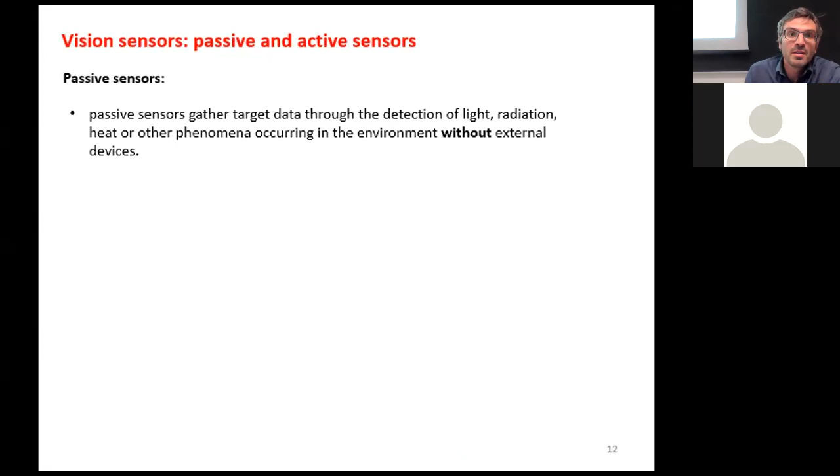So in essence, in vision, in robotics, we have some exteroceptive sensors that are used to detect information from the environment. They are mainly classified into passive sensors that detect radiation and light, like the most famous one, the camera and image sensors, and active sensors that use an external emission device and a receiver to get information on the environment around the robot. The main type of active sensor used in robotics are called time of flight sensors or structured light sensors.

In case of camera sensors, we can use them for measuring distance, or to detect a 2D image. We will see later on how to reconstruct a 3D map from the environment using two cameras.

They are made with photosensitive elements called pixels that transform light into electric energy. This light is directly converted into voltage or current proportional to the light intensity, and mostly these sensors are grouped into big arrays of millions of pixels, and that's why we talk about megapixels when we talk about cameras. A camera also contains other elements like a shutter, lens, and preprocessing electronics.

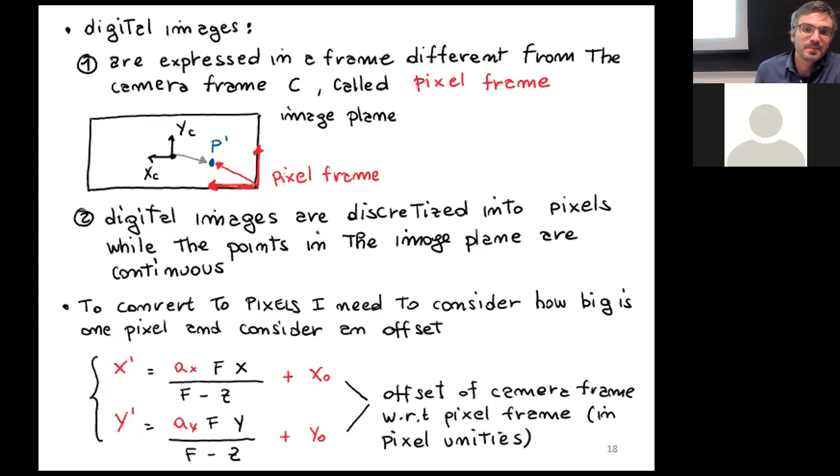Now, the size of the camera could be rectangular, so we can have more pixels on the length rather than on the height. So we can capture this effect by setting two different parameters for vertical and horizontal components. You have to note that all the points on the P prime line map to the same pixel, and that's why we have a projection.

The important fact is that this projection is a nonlinear transformation because we have to divide by the Z component. So we have a nonlinearity here.

But what we want to do, to be able to perform calibration of the camera, is to have a linear transformation to map between P and P prime. Having a linear transformation allows us to represent this relationship as a matrix vector product, which will allow us to perform calibration. To convert the relationship into a linear one, we need to change coordinates.

So we use another system of coordinates called homogeneous coordinates, which is normally used in projective geometry. The peculiarity of homogeneous coordinates is that if you multiply the homogeneous coordinate of a point by a scalar, the resulting coordinates represent the same point.

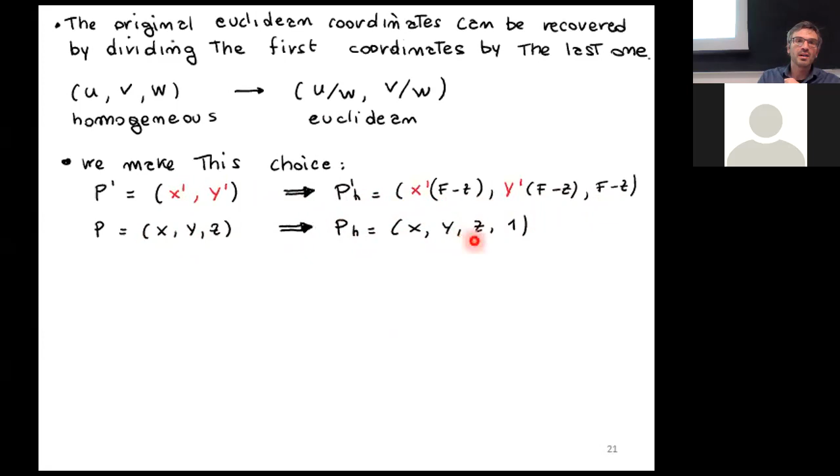Since we can associate whatever homogeneous coordinate we want, for the p prime point we select this set of homogeneous coordinate, while for the p point we select another set using the scalar 1. If we look at the previous relationship expressed in homogeneous coordinate, it simplifies to this one. And we see here that this relationship is linear, because you can put it in a matrix form and obtain a linear relationship between the p point and the p prime point, both expressed in homogeneous coordinate.

And this matrix here is called the camera matrix. If we define the camera frame at the lens center and not on the image plane, the K matrix simplifies a lot and becomes like this. So this is what you find in many textbooks, but for the derivation I prefer to use the other definition.

Up to now, everything is clear, also from the people online. It was a bit fast, the recap, but hope everything is clear. So, we have one problem here.

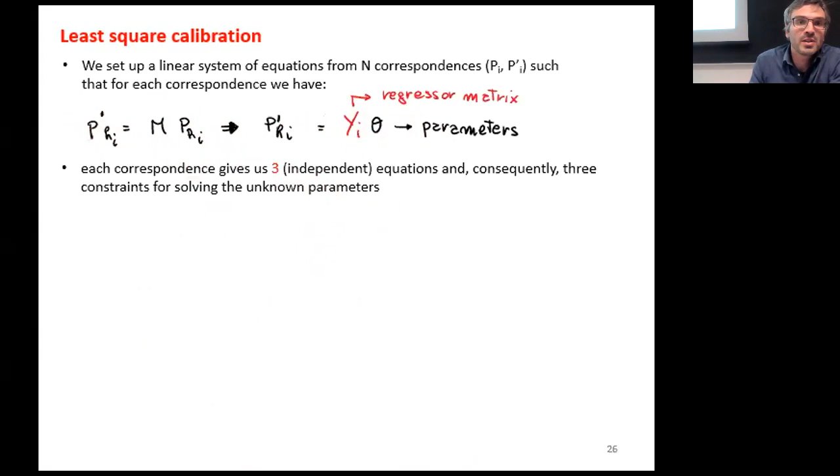You can work out the parameters and fill in this matrix, called the regressor matrix, and each correspondence gives us three independent equations that you can use to solve for the unknown parameters.

So if we have, for example, 11 unknown parameters, because we have 5 intrinsic parameters plus 3 extrinsic rotations and 3 extrinsic translations, it means we need at least 4 points, because 3 times 4 makes 12, bigger than 11, to solve this.

In reality, because measurements are noisy, we can get a least square solution that tries to minimize the residual by taking more measurements. So we usually have more than 4 points.

And if we put this in a big matrix form, we can compute the parameters through the pseudo inversion of this regressor matrix Y.

Everything is clear, more or less. Did you understand how calibration works?

It means taking many points of correspondence between the base frame and the pixel frame, and then getting the parameters by performing a pseudo inversion.

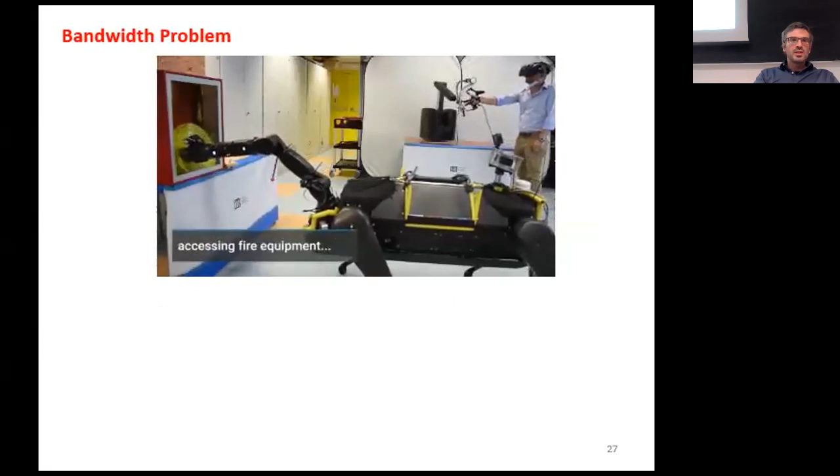Let's do a simple example of how much bandwidth we waste. We see here this is a real robot, still operated by a user who sees whatever the robot sees through a camera feedback. It's picking up objects, moving them, using the feedback from the robot. It's creating a virtual reality environment that the user uses to teleoperate the arm to pick up the object.

But let's see how much bandwidth we need to transfer an image. For example, if you have a very small image, like 576 pixels height and 768 width, we can compute how many pixels we have per frame with a simple multiplication.

We can encode this pixel with 8-bit. For example, in grayscale, we only need 8-bit for each pixel to encode the grayscale intensity. And we need to multiply by the frequency we want to transmit this frame, which should be at least 25 hertz for humans.

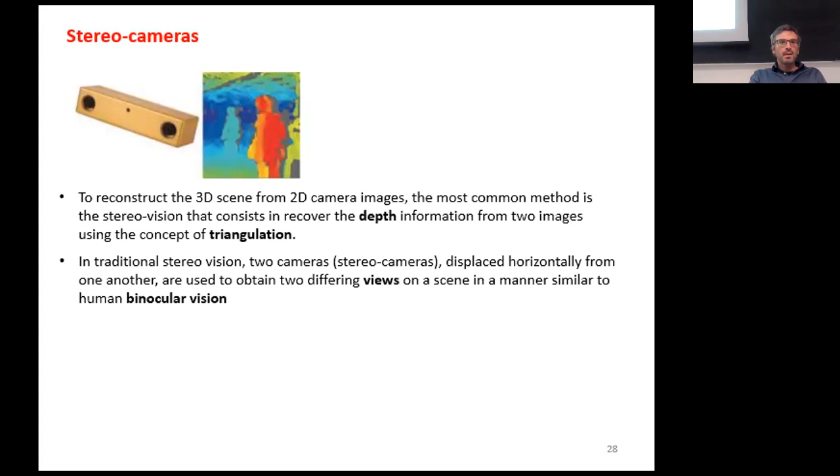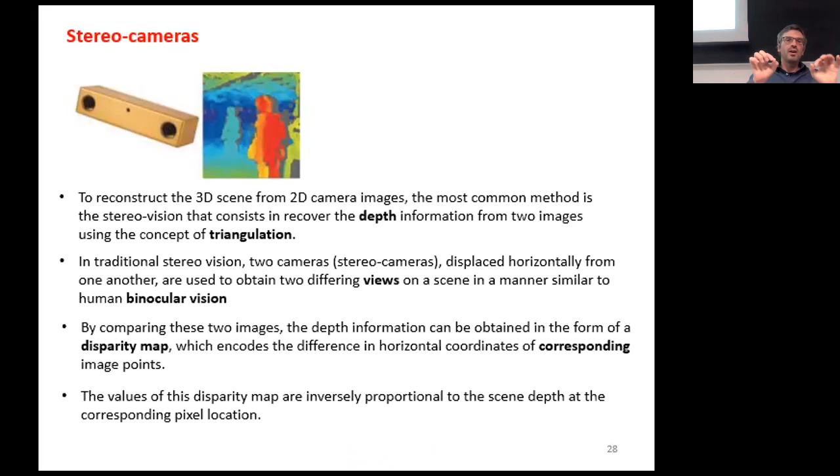This separation allows us to get two different images, and from the difference between these two images, which we call the disparity map, we can reconstruct the depth information. The values of the disparity map are inversely proportional to the depth of a corresponding pixel location. So for every pixel in our two images, we have a difference between these two points, and according to the difference, we can get the distance.

So think about, for example, we have two cameras, one on the left and one on the right. They are separated and have two different image planes, one for each camera. These cameras are located at a distance called B, which we call the baseline.

The same point P is captured in both image planes, creating two points that have a different distance from the camera center, called XL and XR - XL for the left camera and XR for the right camera. The difference between XL and XR is called the disparity for point P.

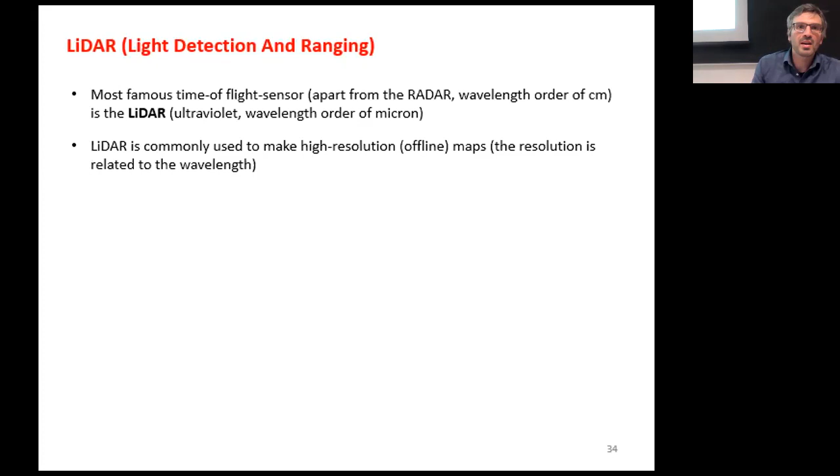LiDAR is commonly used to make high resolution maps, normally offline, using laser waves that can be reflected by very small objects, giving very high resolution. These LiDAR sensors are used, for example, in self-driving cars to create a map of the environment, or offline to create a very accurate map of a warehouse or an oil platform.

A very interesting application we were asked to develop by the region of Valle d'Aosta was to explore the tunnels, the water tunnels used to fill up dams and lakes, or used in hydraulic power plants. Inside the mountain there are kilometric long tunnels that need to be checked every year for water leaks or landslides that could block them.

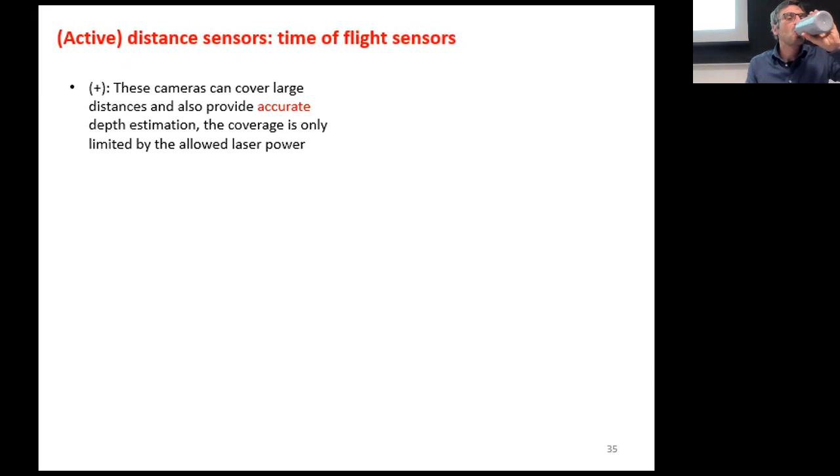Then another time-of-flight sensor that is used is... who is there? Are they closing us inside? No. I just don't know, okay.

The other kind of sensor that is a time-of-flight sensor is the structured light sensor.

We are still talking about the LiDAR class of sensors, time-of-flight sensors. The advantage of these sensors is that they can cover large distances because of lasers, and they provide accurate depth estimation. The coverage is only limited by the power of the laser. In case of shorter distances, frequency amplitude modulation could be used as a strategy to have a measurement not related only to the speed of light and time of reflection. Another advantage is that they are not sensitive to light conditions, so they are perfectly suitable for outdoor application.

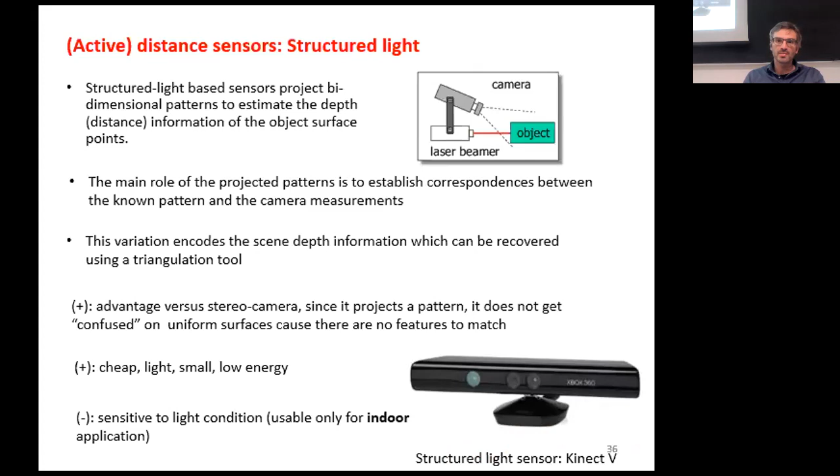As I said, Kinect is an example of this sensor, and normally a Kinect has a 2D camera inside, plus an infrared emitter and an infrared camera. The range is between 50 centimeters and 5 meters. The cost is very low, below 90 euros. The depth for each pixel acquired by the RGB camera is associated with the depth value for that pixel coming from the triangulation of the infrared pattern.

By post-processing, you can do many nice things. For example, you can track human motion. You can attach markers to the body of a human and define a model for these markers, finding a relationship between them. Then in software, you can check the motion of these markers and reconstruct the motion of the humans from the markers.

At IIT, we have many experiments with this kind of stuff, especially whenever we want to study human motion, to understand how humans perform grasping or move in space, or how people that are injured have their walking pattern affected, how their abilities of walking are improving. So we can even detect improvement in motion because of some physiotherapy protocol. This kind of evaluation can be done using a simple Kinect camera.

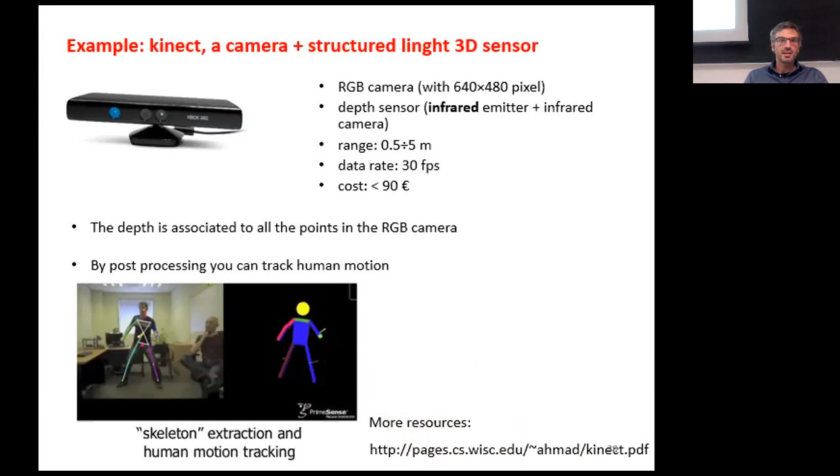Other very simple post-processing of images is contour or edge detection. In this case, from a gray image, you get a gradient of light intensity and use this gradient, setting a certain threshold, to detect the change in light intensity. Whenever you detect a change in light intensity, you can get the contour or edge of the object. Once you have the edges, you can recognize shapes and classify different kinds of objects. For edge detection, there are many algorithms available in the OpenCV library.

If you have questions, is everything clear up to now?

An important point in computer vision is to evaluate the motion of the camera by looking at the changes in the camera images. This is the task of visual odometry, which is the process of estimating the pose of a camera attached to a vehicle or a robot, examining the changes that this motion induces in the image.

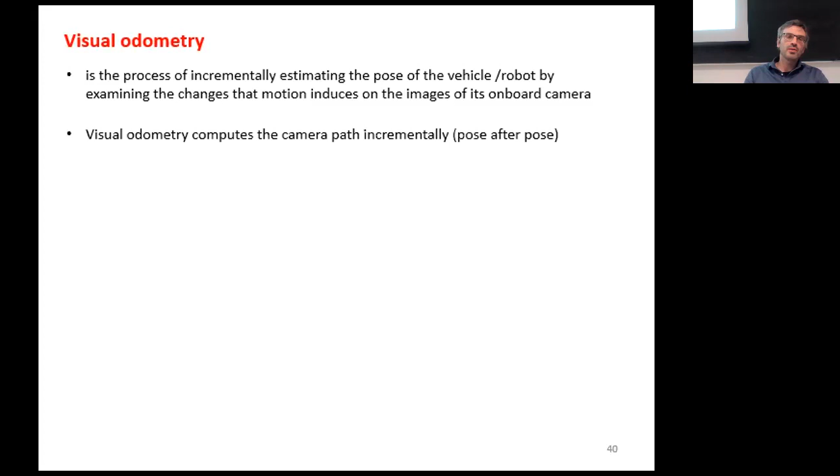So pose after pose, you can extrapolate from the changes in the images the motion that the camera is doing, and use that to estimate the motion of the camera itself. For each image sequence, you need to do feature detection and feature matching, and then you can extrapolate the motion of the camera afterwards.

The problem with this incremental motion measurement is that errors accumulate over time and generate a drift. So the motion that you estimate is not exactly what really happens, but is affected by a systematic error that accumulates with time.

Therefore, one strategy we use in robotics is to fuse different sources for the estimation of motion that rely on different principles. Visual odometry could be one way to estimate motion. We can use a LiDAR to correct this drift in position - every once in a while, we find where we are or where the object is in space with respect to the robot, and knowing the exact position, we can correct the drift that was accumulated by visual odometry.

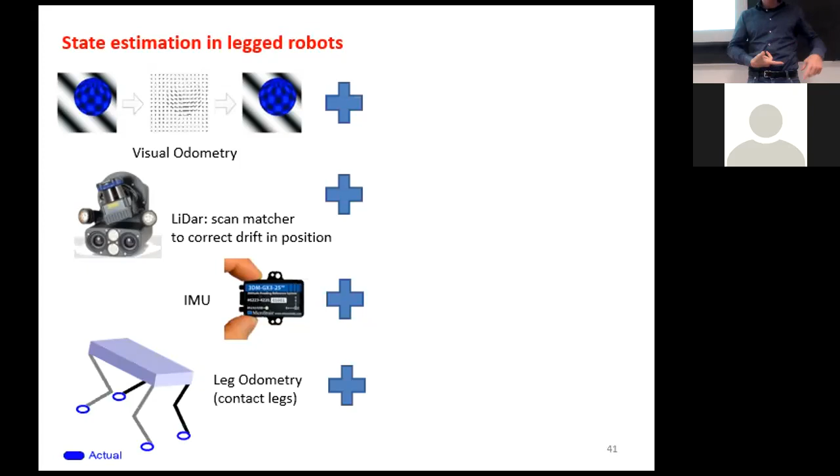Using encoder measurements, and considering that the point in contact on the ground, like the feet, is not moving, we can estimate the orientation and the linear position of the base of the robot. If I have the base frame attached to my body, to my trunk, I can estimate its position. Of course, this works only if you have contact points - if you are jumping, this doesn't work.

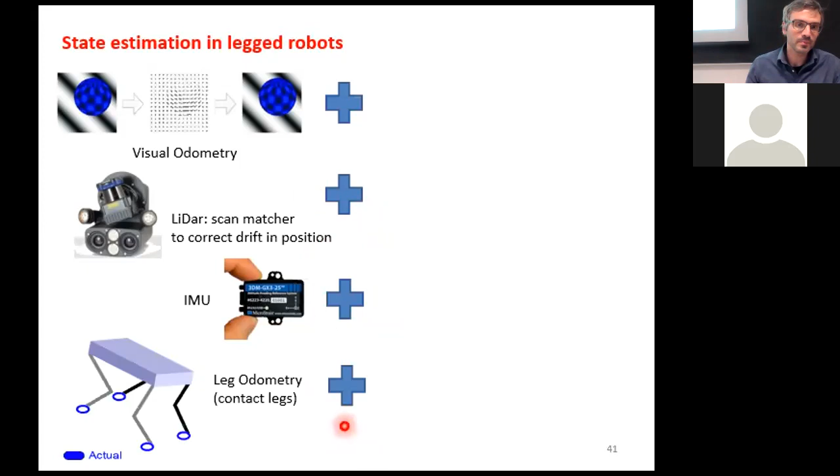But by fusing all of this as inputs for a Kalman filter, or extended Kalman filter, you can get a more accurate estimation of the states that are not observable, such as the linear position and the linear velocity. For example, leg odometry is affected by the fact that there is mechanical compliance in the legs - if the legs deform, I estimate a wrong motion in the base because of the deformation.

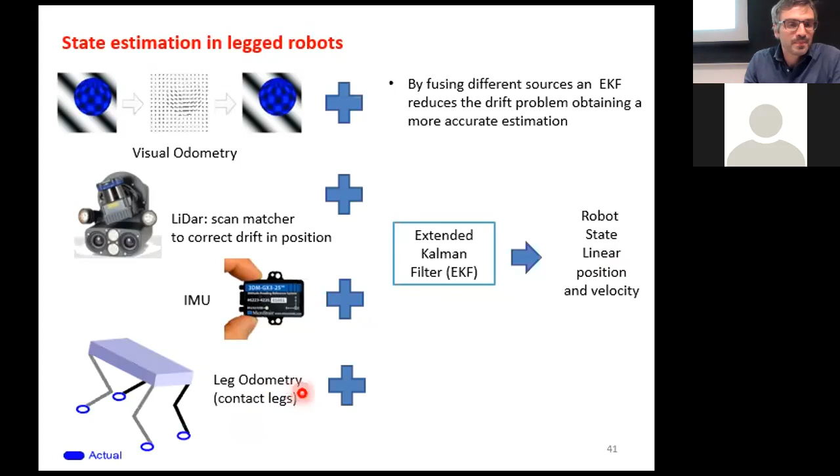Once you have a nice state estimation algorithm, you can walk around and acquire a map. How do you acquire a map? Every time instant, you acquire a set of 3D points. You get your triangulation with your stereo camera, for example, or with your LiDAR.

You get all this 3D map, but you need to merge this 3D point cloud with the one that you will acquire the next sample. In the meanwhile, you could have moved. So you need to exploit the state estimation algorithm to know how much you moved between one acquisition and the other, in order to sum up these point clouds and gradually build up the 3D map.

And how do you put together these point clouds? We can have different representations of building a 3D map from the point cloud. One is the octomap, which is called occupancy map as well.

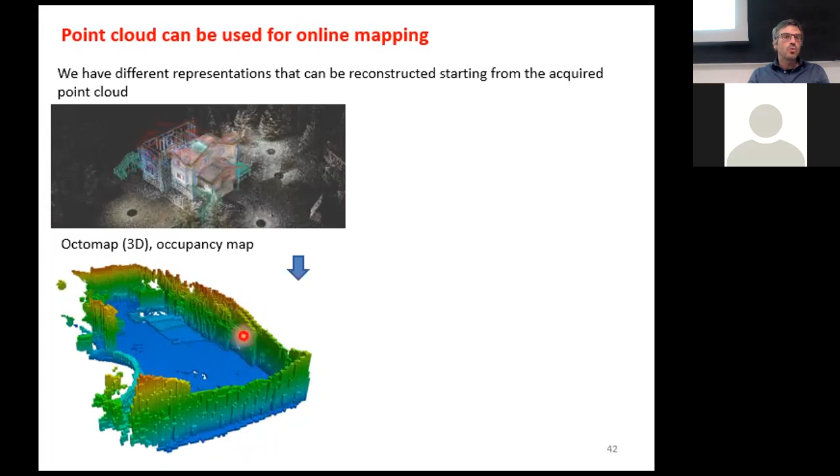This map is very convenient if you want, for example, to get information also in situations like when you have a table and you want to see under the table. This kind of map discretizes the environment in voxels, which are little cubes, and gets the real occupation of the objects in the environment.

While the elevation map, or height map, is called a 2.5D map because it gets only the height. So if you want to look under the table, you cannot do it with this kind of map, because to every point in the XY plane you associate the height, but you cannot see situations where you have a hole under your pallet.

For example, you want to walk on the pallet and there's a hole under the pallet, you don't see this hole, because all the points on the pallet just give you the height, a scalar field on the surface. So you don't get any 3D information under the surface for each XY component.

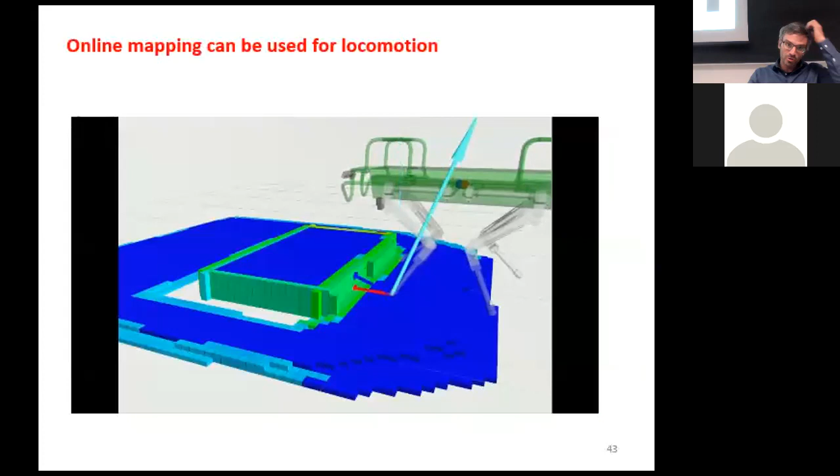This is the height map, and we usually employ it for locomotion. For example, you can use it to detect a step and adjust the swing to avoid the step, and walk over the pallet, for example.

Then the last class of distance sensors, used in the automotive field and in industry whenever you want to detect the presence of an object on a conveyor belt, for example, are proxy sensors. They are used to detect the presence of an object in a specified interval of distances. They typically have an on-off output, so object present or not present, and they have a short distance range.

These proxy sensors are based on different technologies. One of them is ultrasound. It's very low cost, and you usually put an array of this sensor around, for example, a mobile platform that needs to move around and avoid hitting obstacles or objects. This is a typical application of this kind of sensor.

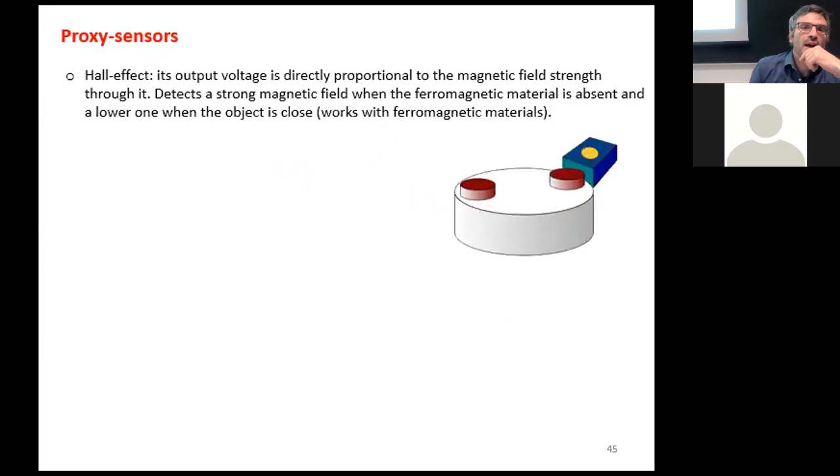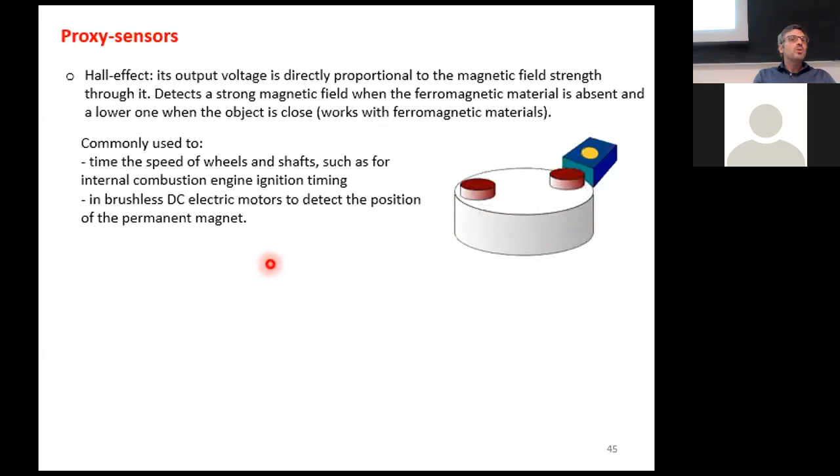These kinds of sensors are typically used whenever you want to synchronize a rotating part with some other element, like in a combustion engine, where you want to synchronize the spark for the ignition to the angular position of the motor shaft, or in brushless DC motors, where we will see them used to detect the position of the rotor, or the permanent magnet of the rotor.

The other way is to implement a proxy sensor using capacitance. This proxy sensor based on capacitance variation can detect all kinds of material, even solid and liquid, because they are based on the variation of the capacity induced by a surface that is close to the sensor. One armature of the capacitor is on the sensor, the other one is on the object to be measured. The detection range is again very small, a few millimeters, and the response depends on the material, but can be very precise if tuned for a particular object.

And this is the last slide of the exteroceptive sensor part. If you have any question about that, otherwise we move to the next part.

If you consider how controllers are implemented nowadays, they are implemented on digital machines, on computers, on microcontrollers. This means that, for example, this is a typical sketch of a closed loop control system. We will see this more in detail in the control section topics.

In a closed loop control system, you have a reference to be tracked. You have a measure of the controlled variable that is your output that you want to control. You normally have a system to control that is a plant that generates the controlled variable, for example the position of your link. You have an actuator that applies your control action on the plant, and the object that decides how to command the actuator is the controller. It usually compares the reference with the measurement of your controlled variable, and according to this error between the measurement, the reference, and the output it decides an action, that is the control variable to apply to the actuator.

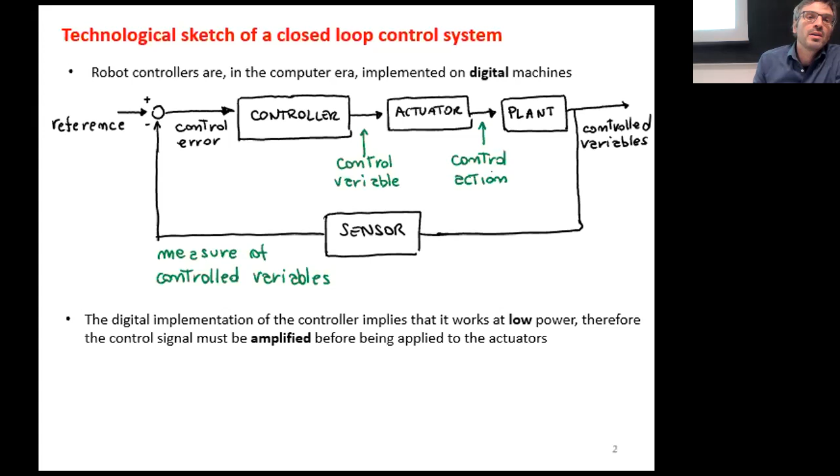The digital implementation of the controller implies that usually this controller works at low power. So the plant, our robot, requires a high power control action, while the output of a controller is an informative signal that is in general an electrical signal, but at low power. So our control variable needs to be amplified before being applied to the actuators, while the actuator usually converts the low power signal into a high power signal, making the control signal compatible with the plant input, for example the torque input of our robot.

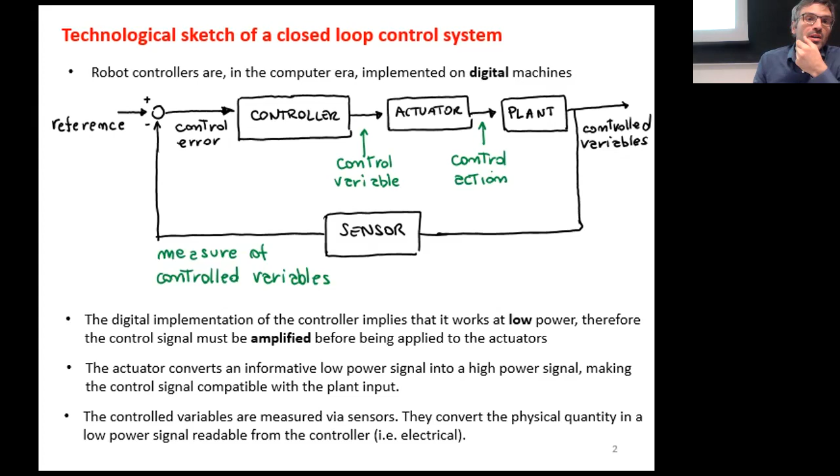The controlled variables are usually measured via sensors, and they convert that physical quantity into a low power signal readable for the controller, for example an electrical signal. To be able to adapt this low power world with the high power world of the real system, we have two fundamental elements, and also to adapt the fact that the real system is living in a continuous world.

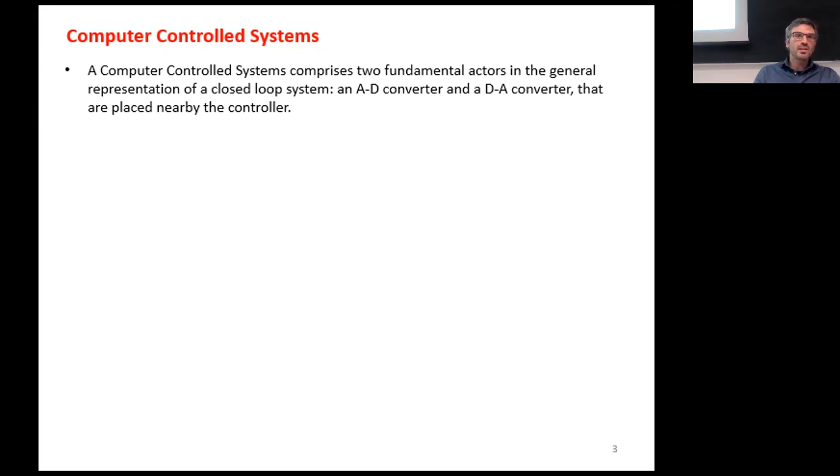The torque is continuously changing, not only at some time instant, while the controller is running at a certain frequency. It can have a knowledge on the environment and can apply an action on the robot at a certain time instant. To have this connection between these two worlds, we have two elements: one is the analog to digital converter, and the other one is the digital to analog converter.

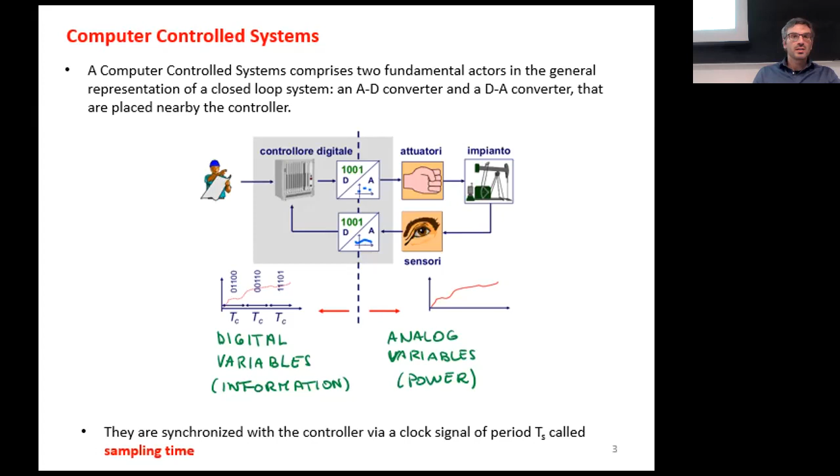You see this, the previous closed loop system, differently sketched, and all these signals are synchronized with the controller on a period, according to a period TS that is called sampling time. So the controller reads the sensor at a certain sampling frequency, while it applies its action at a certain frequency. We have a digital to analog converter whenever we want to convert the digital signal coming from the controller into an input for an actuator, and we have an analog to digital converter when we want to convert our sensor output into a digital signal.

So this is what I just said, and the time intervals wherever this sampling happens are called sampling instants. You see here the different kinds of signals. The controller output is a digital signal. Then we will see what this is, and you have an analog signal on the output.

While quantized signals are signals that can assume only a limited number of values, and can be represented by, for example, n bits. With n bits, you can describe 2 to the power of n discrete levels. And the minimum variation your signal can vary is called the quantization level Q.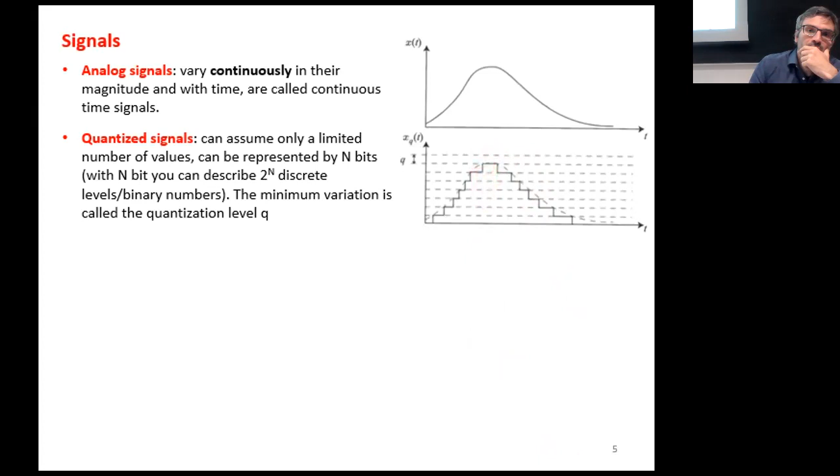Sample signals are analog signals that are evaluated only at the sampling time instance. Sample signals are also called discrete signals, and they have continuously varying amplitude, so they can assume whatever value, but they are evaluated only in some moments.

This is the way you define a sample signal. X of t is the analog signal, and the sampled version of the analog signal is x of k ts, because k varies from 0 to whatever number, and it's multiplying this time interval ts for 0, 1, 2, 3, 4, and so on.

While digital signals are a quantized signal that is sampled. So it's something in the middle between these two. We take a quantized signal and we sample it, and we obtain a signal that can assume a limited number of output levels, and is also evaluated at the sampling interval.

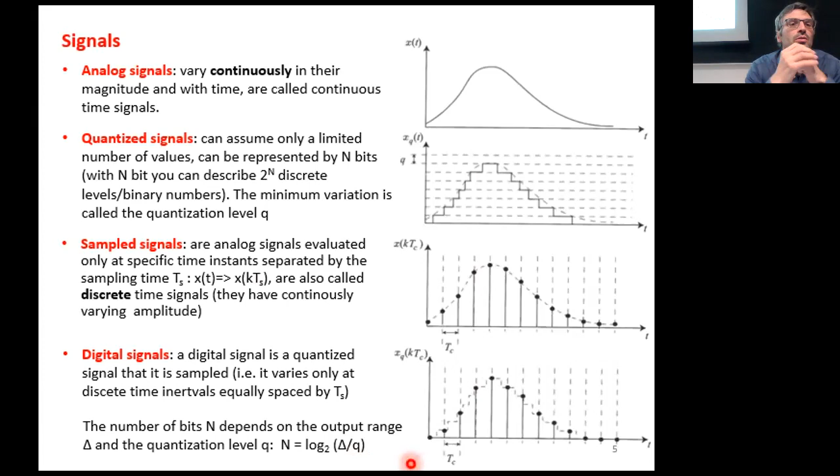For example, commonly used AD converters for a robotic sensor are 16-bit, and you can compute by inverting this relationship how much is the quantization level that you can measure. For example, for a 0 to 10 voltage or 0 to 5 voltage range, which is typically what you have in your acquisition board.

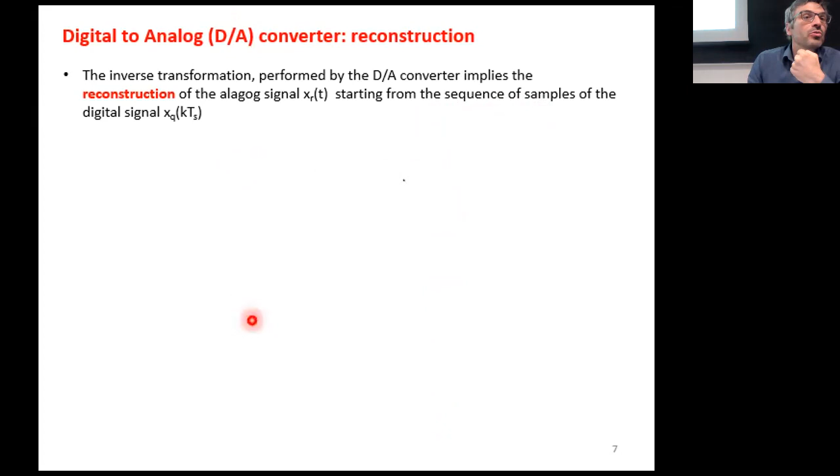And this is realized by the component that is called zero order hold. Did you ever hear about this?

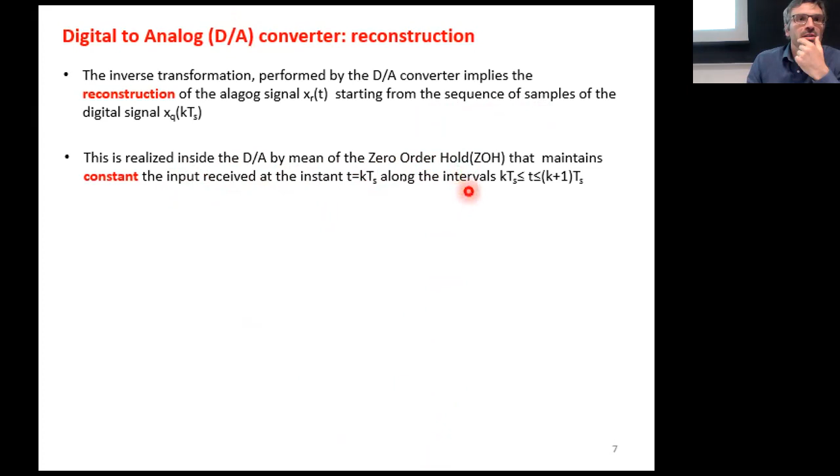So zero order hold is a component that maintains constant the input received at a certain time interval along all the sampling time. So if you have our digital signal here, after passing through the digital to analog converter, we get this: the value of the digital signal at some time interval is kept constant all the time interval. Then a second digital value comes and is kept constant along the interval. And you get this reconstructed analog output.

What is the problem, in your opinion, with this reconstruction?

Staircase function. And what does the staircase cause?

Apart from vibrations, let's say we are sampling quite fast, and the mechanical system is slower, then our sampling frequency is not responding to these stairs. What is the problem of doing this, keeping constant, and why is this a problem for a control system? Yeah, but as I said, the time constant of the actuation of the system is very low with respect to this, so it's filtered out.

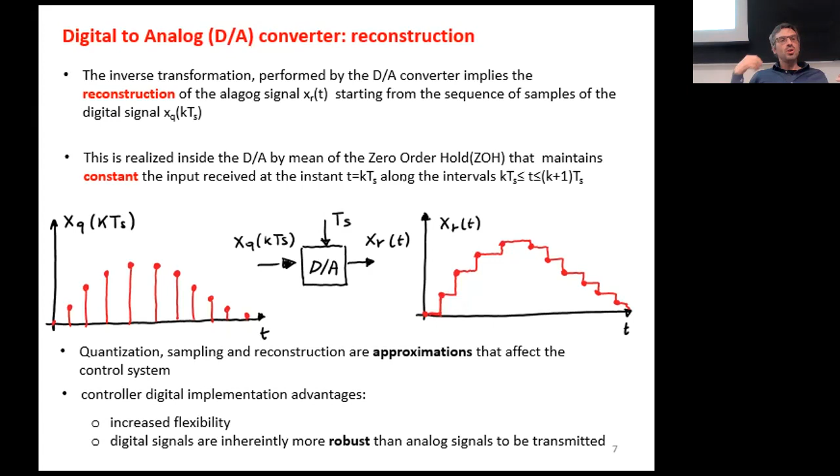The other advantage, apart from flexibility of digital signals, is that they are more robust than analog signals to be transmitted. If you encode to digital, you can have a value that goes between 0 and 1, where 1 is, say, 12 volts or 5 volts. If there is electromagnetic noise coming from the environment, from your cell phone, that couples and disturbs your signal, still the two levels are so far apart that it's more robust to this, and it's less frequent that you have a change in your bit level because of external noise.

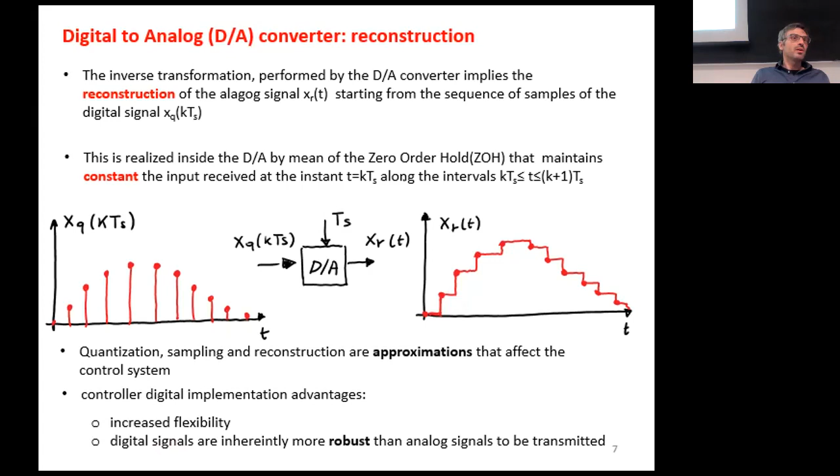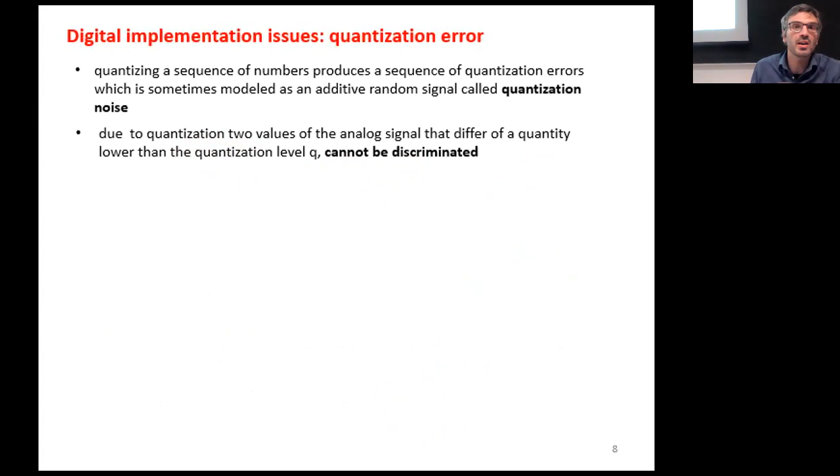But another problem we saw in digital implementation is the quantization error. We already saw that, we can repeat quickly. Whenever you quantize a signal, we are adding an additive random disturbance called quantization noise, and because of the effect of quantization we cannot discriminate two quantities whenever they are closer than the quantization level. The quantization can be implemented by truncation or rounding, showing these two different patterns.

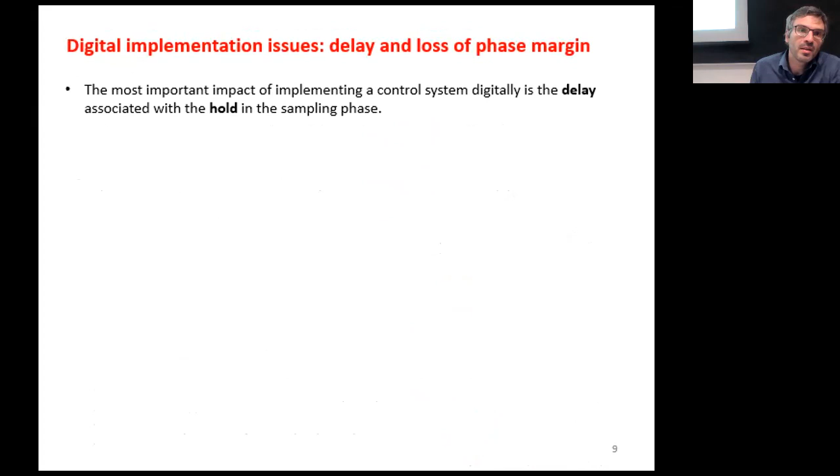Here we come to the other issue of digital implementation: delays. The delays are associated with the sample and hold, with the hold part of the sample and hold. We can see that if we have our discrete signal, the average, we have our reconstructed signal that is this one. The average of this, which is a dashed line, is an approximation of the original signal, that is this one. So we have a delay of half of the sampling time.

This delay can degrade performance, especially when your control law is implementing a damping. We will see what a damping controller is, and it affects stability, because it creates a loss of phase margin in your control system. This loss of phase margin you can evaluate, for example, at the crossover frequency of your system. For a delay of sampling time divided by 2, it translates into a phase delay of minus omega Ts divided by 2, where omega is the crossover frequency.

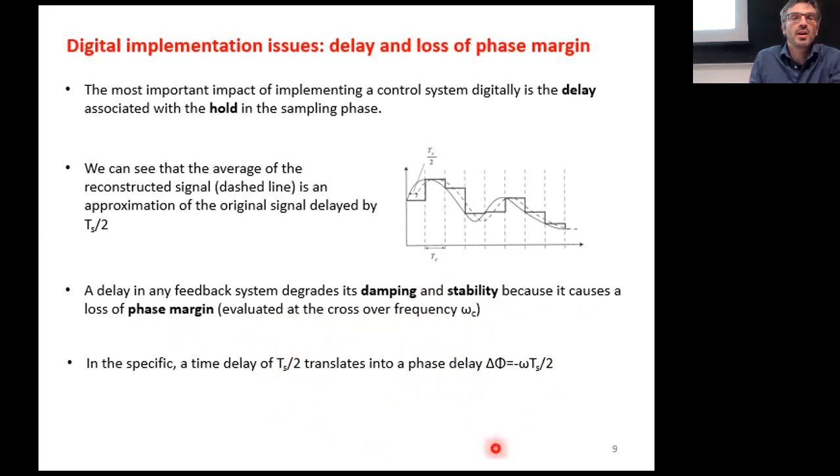Is it clear? So reconstruction creates delay and creates problems in the controller. Quantization creates problems in terms of quantization errors. And the last problem in this time, due to sampling, is the aliasing.

Think about our signal that we want to sample, our analog signal, that has a certain frequency content. This is the plot of the spectrum of the signal that represents the frequency content. The frequency content, the spectrum, is also flipped onto the negative axis. Did you ever see what a spectrum is? Fourier analysis is used to obtain this plot, and it tells us, in essence, what the frequency content of our signal is. We see that here, for example, our analog signal has a frequency content below a certain frequency B.

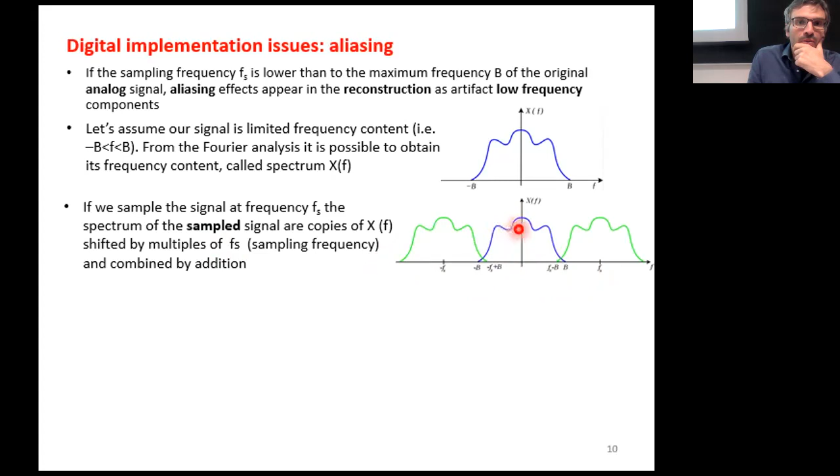If we sample this analog signal at frequency Fs and compute a spectrum of the sampled signal, we see that the spectrum of the sampled signal is a repetition of the original spectrum of the analog signal, and these repetitions are shifted by multiples of the frequency Fs.

If the sampling frequency is bigger than 2 times the maximum frequency content of the analog signal, it's possible for these copies to be distinct from each other. This means that from the sampled signal we can reconstruct the analog signal, for example by putting a low-pass filter across the signal. Otherwise, if the sampling frequency is lower than 2 times the maximum frequency content of the analog signal, these copies will overlap and create a lower frequency component in the reconstruction, which boils down to the phenomenon of aliasing.

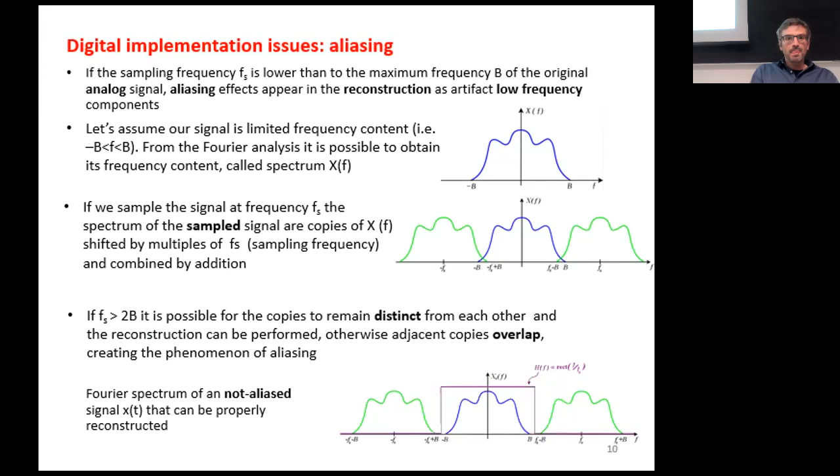So here you see what I said before: if you're able to sample at twice the bandwidth of your analog signal, then you can reconstruct the signal and there is no overlap. You can see this in this example.

This is exactly what you see. It's called the stroboscopic effect. What you see in cars whenever you see their wheels in a video, they rotate backwards.

An important theorem is the Nyquist-Shannon theorem that tells us a sufficient condition to compute a sampling frequency that allows us to avoid the aliasing problem and makes us able to capture all information from the analog signal of a certain bandwidth B. If a sampling frequency is bigger than 2 times the bandwidth of your signal, then we don't have aliasing.

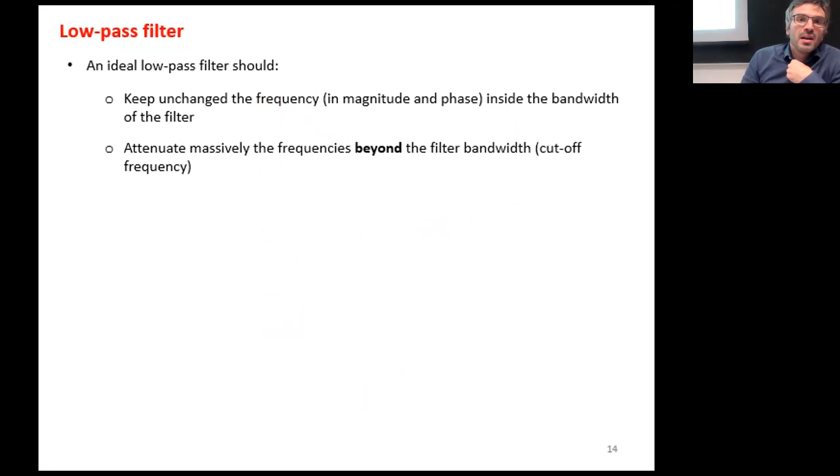An ideal low pass filter should keep the signal unchanged in magnitude and phase inside the bandwidth of the filter, and attenuate massively the amplitude of the signal beyond the filter bandwidth, which is at the cutoff frequency.

Did you see a Bode diagram in previous courses? How many of you? Raise the hand. Very good, okay.

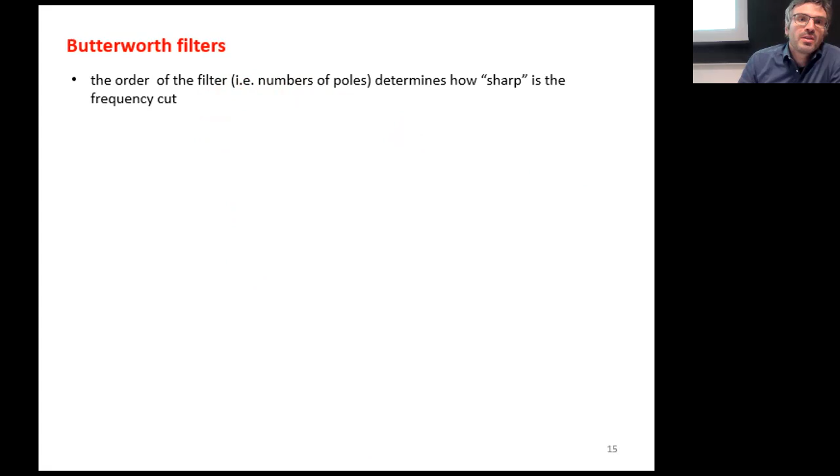Another class of low-pass filters are the Butterworth filters. Their peculiarity is that they have a higher order, so more than one pole in general, where the order of the filter is represented by the number of poles, and the order of the filter determines how sharp the frequency cut is.

In general, the gain of the filter, the transfer function between output and input, is 1, because we don't want to scale down our signal. We want to just remove the higher frequencies.

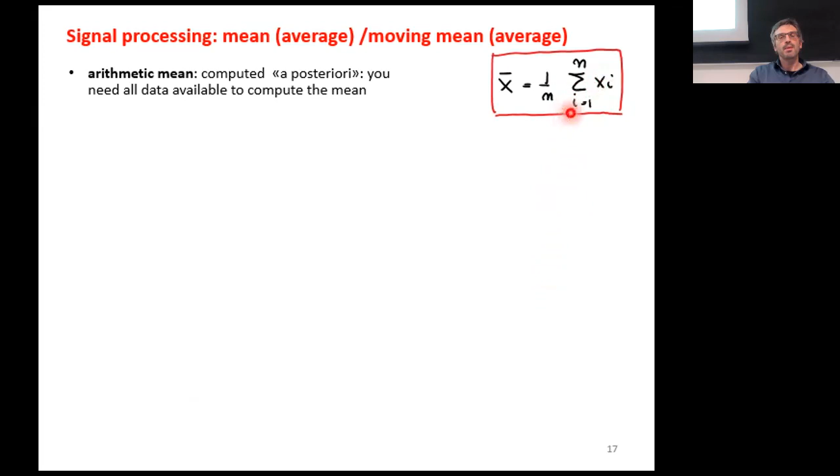But what is the problem related to this approach? Let's say you are collecting your input signal and you want to compute the mean. If you could keep all the data, that's one problem, but the other problem is that the number increases, so you're going to overflow, because at some point you will reach the limit of your representation. Let's say you're using a double or an int, you have a maximum number you can represent, and this number increases because you're summing up stuff, and at some point you overflow.

To avoid overflow, you usually use a moving mean, which means you compute the mean only of a subset of your full data set—you don't use the full data set. The first element of a moving average is obtained by taking the average of the initial subset of samples. Then the next element is obtained by shifting this subset by one element, meaning excluding the first number of the series and including the next one in the subset.

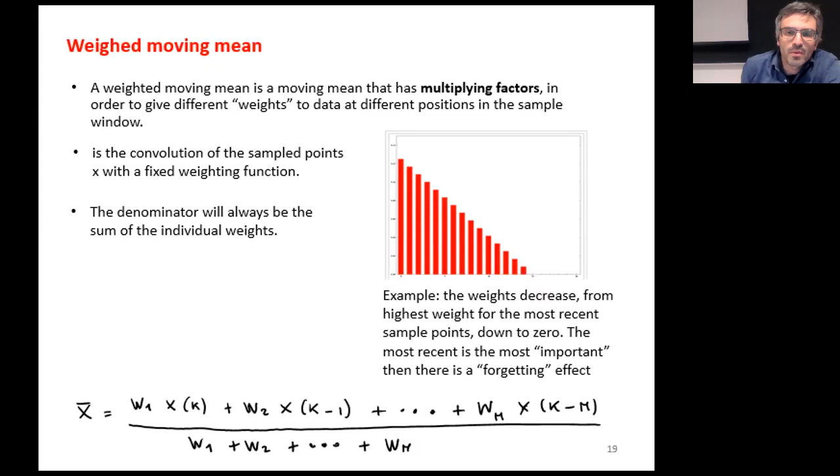Octavio, can you see the slides? Yes, we can see.

So we quickly start this new chapter about actuators. We talked about sensors until now, and in this lecture, and the set of lectures to follow, we will review the kinds of actuators we use in robotics. We will talk mainly about electrical motors, which are the most diffused actuators in nowadays industrial robots.

And we will talk about transmission, which is the way that you map your actuator, adapting your actuator's capability to the system you want to actuate. For example, if you want a high torque and you don't have enough torque in your electrical motor, you might want to use a reduction gearbox to amplify the torque.

And then finally, we will discuss some non-idealities in actuation systems, and finally, how to perform a simulation of an actuation system, in particular of a DC motor, which we will then use in our first lab of control. The simulation will just be an open loop simulation, free motion of our actuator, while in the lab we will close the loop with the controller and the actuator together.

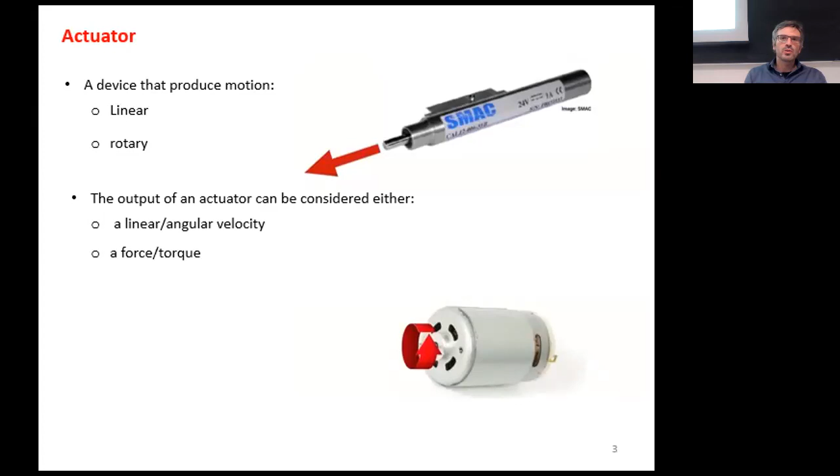The actuator is a device that produces motion. This motion can be linear or angular, in case of rotary actuators. And the output of an actuator would be linear or angular velocity, in case we consider the actuator as a velocity source, or a force or torque, in case we consider our actuator a torque source.

What we will consider in our course is actuators as force or torque sources. There are other approaches that consider actuators as velocity sources, but we don't care about that, because in this course we will define models of the robot, rigid body models, that want force as input and provide acceleration as output. Since they want force as input, it's more convenient to consider actuators as force and torque sources.

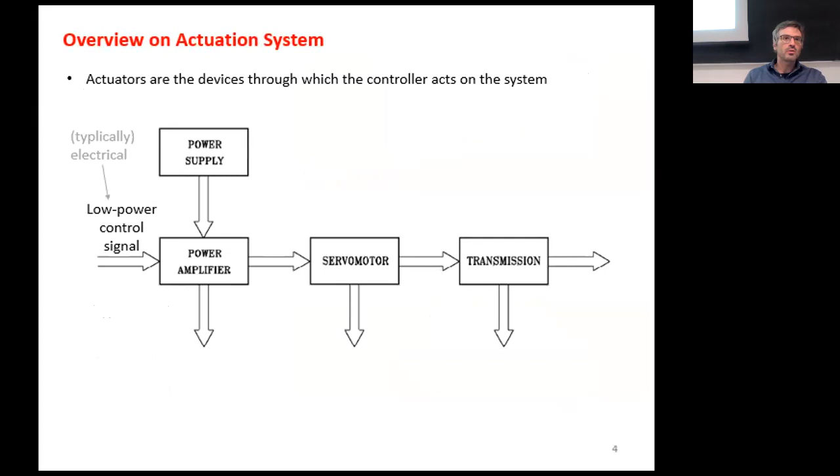So actuators are the devices through which the controller acts on the system. We saw the sketch before, and they are used to map a low power control signal, typically electrical, using some supply power that could be electrical, hydraulic, or pneumatic, and create a high power control signal that transmits some mechanical power through the transmission to our system that we want to control.

And there are power losses as well due to dissipative effects that are present both in the actuation and in the transmission and in the system, that are, for example, due to friction or joule losses in the electrical motors. This is mechanical power that we want to convert from electrical power, for example.

And the power can be defined as the product between different quantities. Normally, if you consider a power flow approach, you have an effort variable and a flow variable. In the electrical domain, the power is defined as voltage times current, where voltage is the effort variable and current is the flow variable. In the hydraulic domain, you have power expressed as flow rate times pressure.

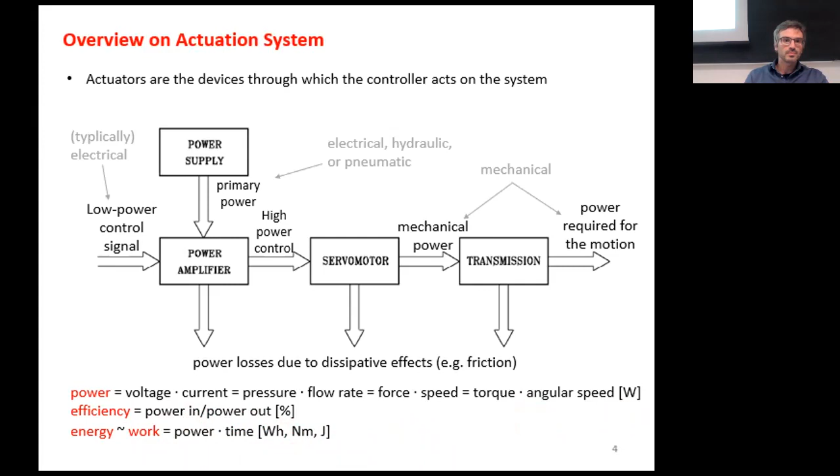So the actuators in robotics have different requirements, and the most important one is to have a high power to weight ratio, because we want to have low weight in the actuators and low inertia. We want to be able to move our link, but we don't want to increase the mass and inertia of that link, because in that case we will need more power to move the link.

In the case of a mobile robot, this requirement is super important, because the mobile robot needs to carry around its own weight. So reducing the inertia of the link and of the actuator is important, because it will have less requirement in terms of energy from the battery, for example. We see also that the inertia of the rotor of a DC motor affects the inertia of the link.

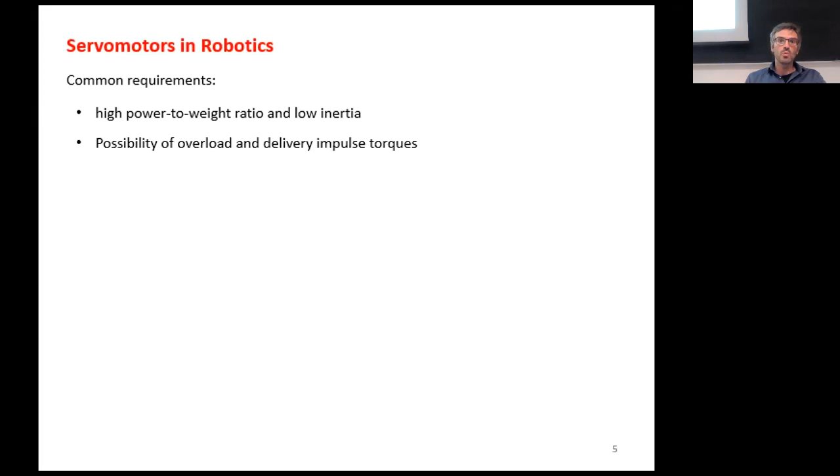And then we want to have the possibility to have overloads sometimes and deliver very impulsive torques. Why? Because we want to have high accelerations. We don't want a constant motion - normally we want to move the end effector from one place to the other. The best way to do that is to accelerate as fast as you can till the middle of the trajectory, and decelerate as fast as you can, because normally you want to do this motion quick. So we want to deal with high accelerations.

We want a large range of operational velocities, because we want to move accurately and slowly whenever we perform a machining operation, for example, or we want to move quickly when we move from one point to the other of the workspace. And we want also high accuracy in position.

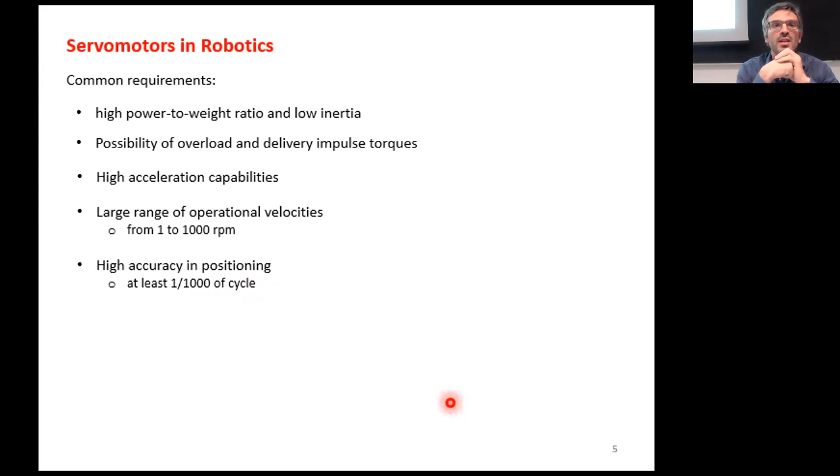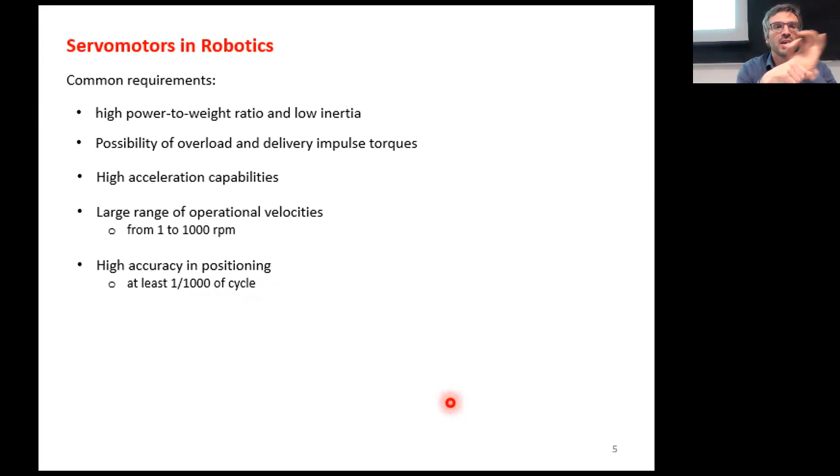Normally it's 1/1000th of a cycle. This looks like low accuracy, but if you think about what we discussed today - there was a question at the beginning of the lecture about transmission that transforms a rotational motion into a linear motion with a lead screw - we see that if we measure the positioning on the motor, we will have a very high accuracy because of the reduction ratio on the linear motion.

Then we want a low torque ripple. We will see that in a DC motor or in synchronous motors, we have ripples in the torque generation that can create vibration at low speed, and we want to reduce that.

Also, power is a requirement that can be very different. In case the robot needs to interact with a human, the power needs to be limited to 80 watts. We can have very big industrial robots that move around cars, going up to 10 kilowatts. In that case you don't want to get close to the robot, and normally they are located inside a big cage, inaccessible by humans.

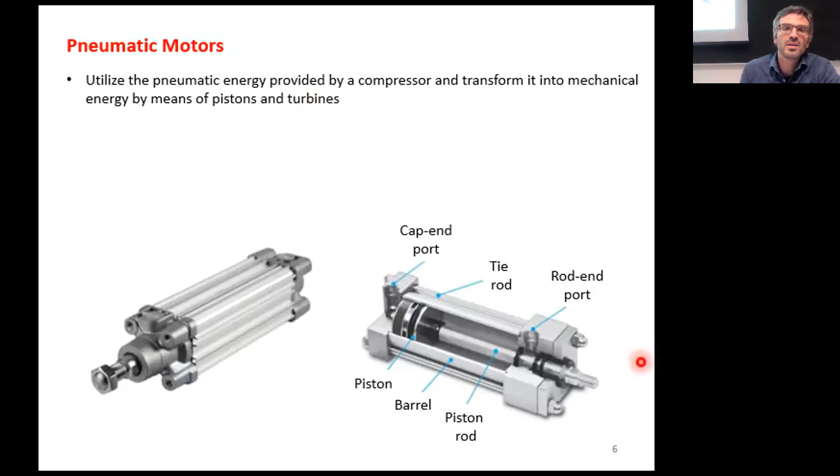The first pneumatic kind of actuator we describe is pneumatic motors. The source of power here is compressed air. There is a compressor that compresses the air and provides some pressure, and then this pressure is turned into mechanical energy.

The pump normally works, or the compressor works, with pistons and turbines, and provides high pressure. This high pressure is transformed into mechanical energy by means of valves. I will correct the slides.

Opening the valve, you can move the pistons in one direction or the other. Pneumatic motors are difficult to control accurately because the fluid compresses. Because of fluid compressibility, it's hard to have accurate positioning and also fast reaction, since you usually have slow transients. So whatever you use pneumatic actuators for, it's for low force applications that require intrinsic compliance.

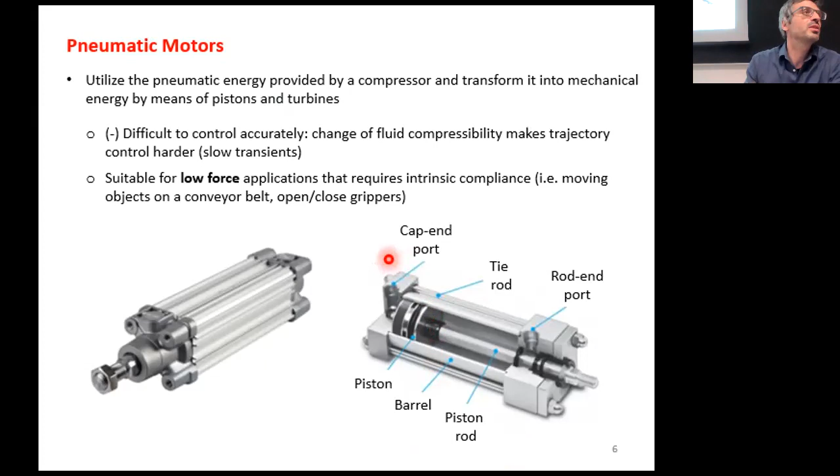For example, when you are grasping an object on a conveyor belt or opening and closing grippers. Normally the grippers are actuated with pneumatic actuators. You can have some examples of pneumatic motors.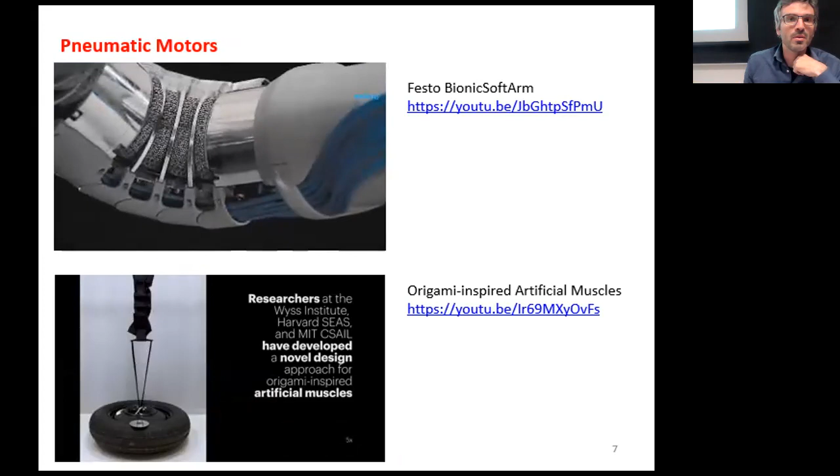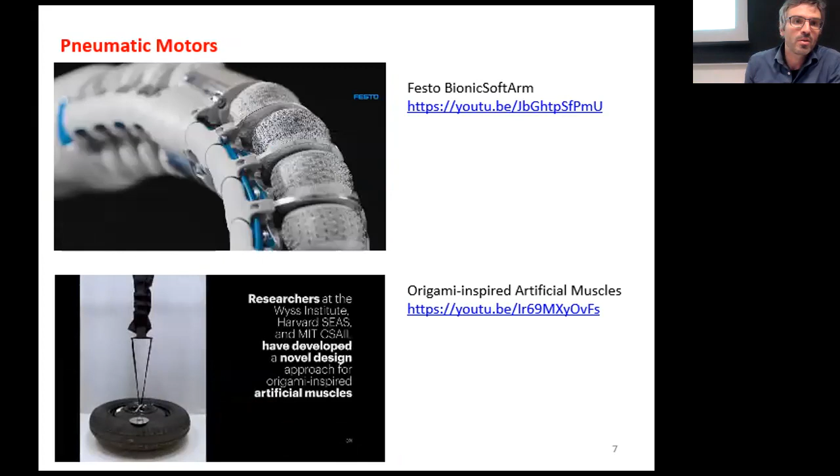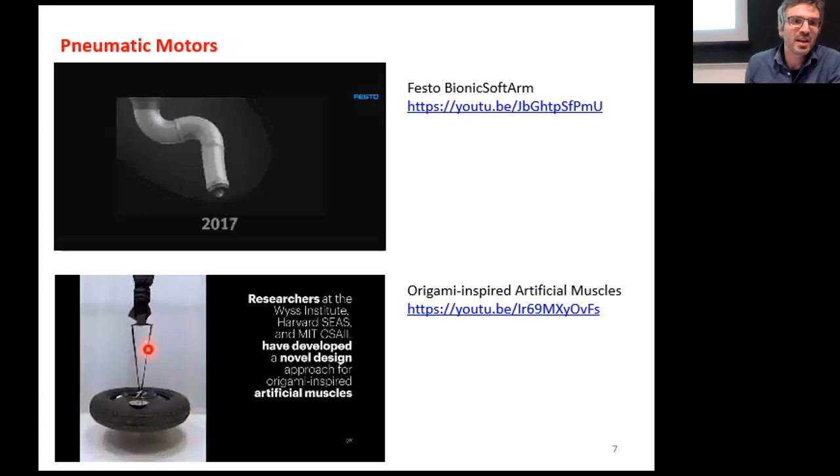From Festo company, like this example, it's an arm. You also see here an application for pulling up loads. They can be very powerful with this origami arrangement.

So they can extend or compress, and you can use this for pulling loads. An example of a pneumatic actuator is a McKibben actuator, which is a pneumatic muscle that compresses and extends exactly like a human muscle, creating pressure.

There is this braid of interleaved, twisted bladder element that, when it inflates, contracts. So if you pressurize it, it contracts. When it depressurizes, it extends. And of course, the extension is passive.

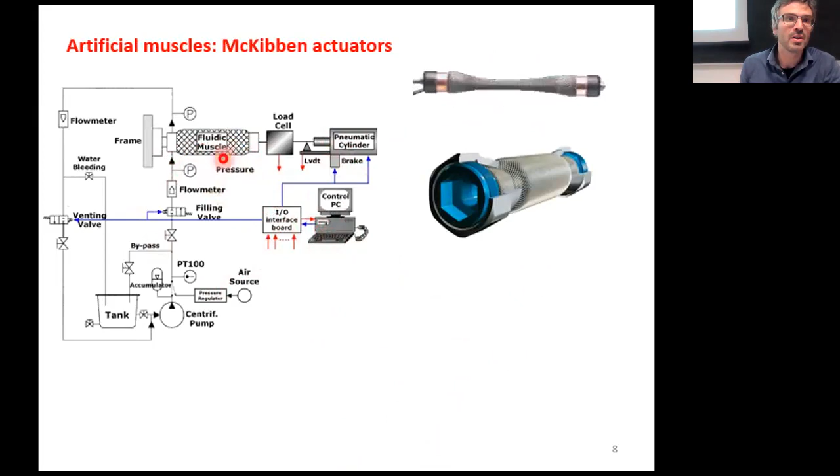So normally you use these muscles in an antagonistic way, such that whenever one compresses, the other relaxes, and the other way around. I did work on this back in 2010, using this in a system to characterize these kinds of muscles using air and water and see how they behave.

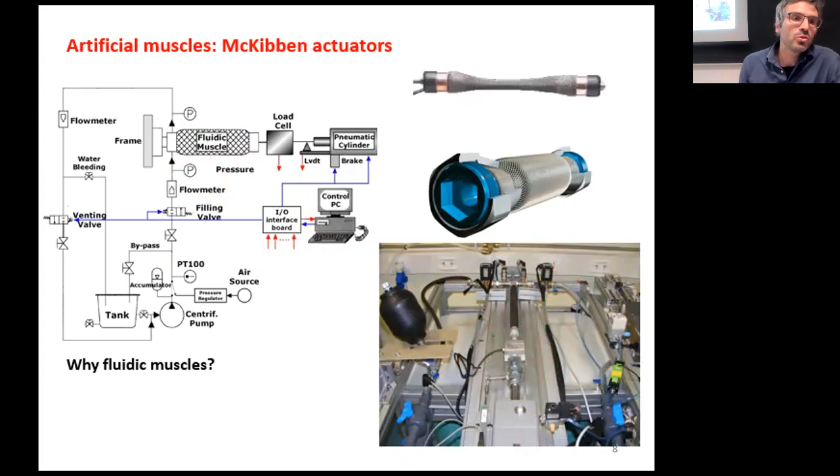Why do we want to use fluidic muscles? Because they are lightweight, have no gears, no backlash, and can change both position and stiffness. By co-contracting these two antagonistic actuators, you can either stiffen the link motion, making the link stiffer, or move the link. If you co-contract, you increase the stiffness. If you contract one and relax the other, you move the link.

And they tolerate misalignments. That's another point.

Hydraulic motors, actuators, are similar to pneumatic actuators. The difference is that they employ oil and not air, and oil is usually considered incompressible. So the bandwidth of a hydraulic actuator is much higher than a pneumatic actuator, because whenever you pressurize the oil in one point, the pressure wave is propagated instantaneously in all the places where the oil is.

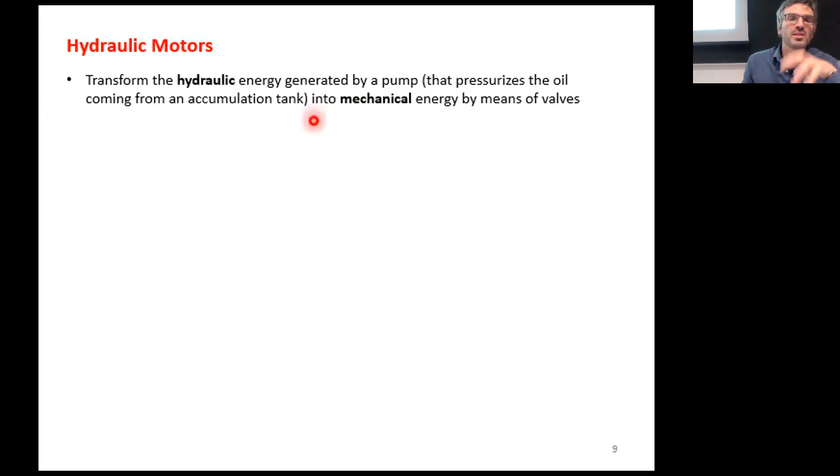The idea of hydraulic actuators is very similar to the pneumatic ones. Instead of a compressor, we have a pump that pressurizes the oil coming from an accumulation tank. This pump creates pressure, and then the mechanical energy is obtained by means of valves.

We see here the oil pressure coming from the pump, and then moving the valve, we pressurize either chamber of the piston, or moving the valve to the other side, we pressurize the other chamber of the piston. In general, if one chamber is pressurized, the other chamber is connected back to the tank at zero pressure, because normally it's at atmospheric pressure. The difference in pressure is what creates the force on the piston rod and moves the piston from one side to the other.

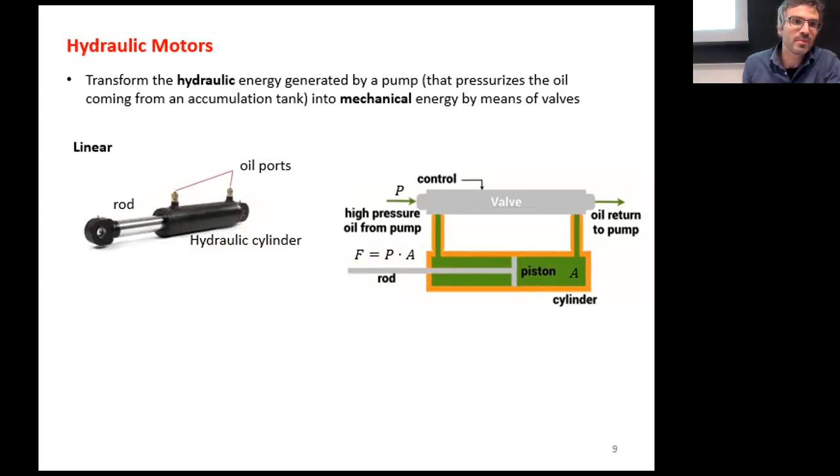Now, you can have linear pistons like this, called linear hydraulic actuators or hydraulic cylinders. And you can also have rotational hydraulic actuators, called hydraulic motors or rotary actuators.

The advantage of hydraulic actuators is the very high power to weight ratio. Instead of what we see in electric motors, where if you want high torque you necessarily have low speed, in hydraulic you can have both high torque and high speed in a very small and compact element.

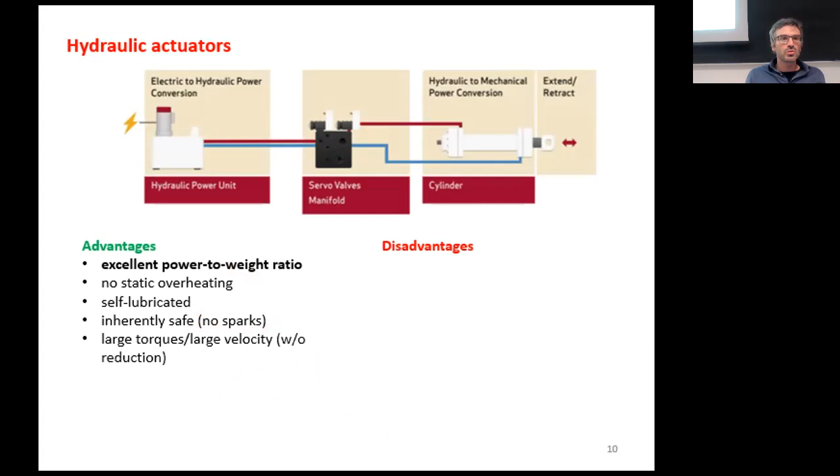They have no static overheating like in electrical motors. They are self-lubricated because we have oil. They are inherently safe - they don't have sparks like electrical motors. They also have large torque, large velocity, and passive compliance.

This is related to the fact that oil is ideally incompressible, but has some level of compressibility. This compressibility means that if you get an impact in our actuation system, for example in a link, the pressure increases locally in the oil because of compressibility, and the oil compliance mitigates and dampens this impact force without transmitting it to the structure.

That would otherwise create fatigue on the structure after a while. If you think about a legged robot walking on the ground, you have continuous impact with the ground. You need to dampen this impact, otherwise after a while your robot will fall apart and break because of fatigue. Fatigue is whenever you have a constant mechanical load, even small, hitting your structure, and after a while your structure can be damaged.

Disadvantages of hydraulics are that they need an external pump and hydraulic supply. They're harder to control because they are non-linear - there's a non-linear relationship that relates flow and pressure with your valve opening. And they are large size; usually it's very difficult to have small hydraulic actuators.

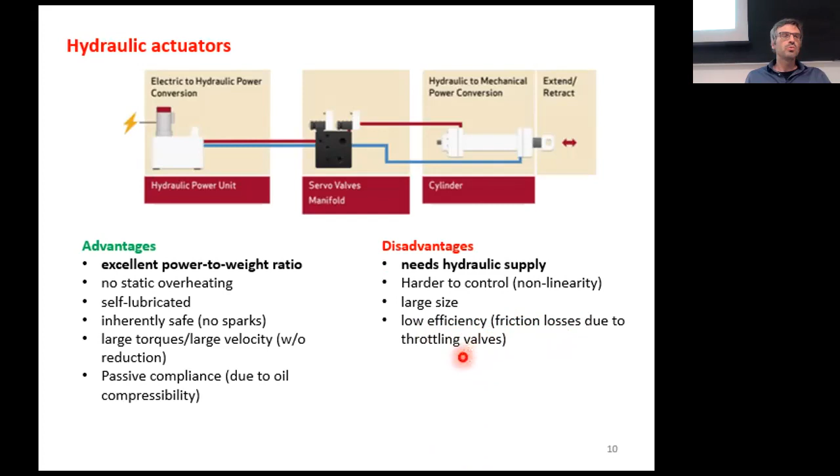They have low efficiency, related to friction losses due to the valves. So if you have your supply pressure fixed at, say, 180 bars, and you want to create a very low force on your actuator, you close the valve and drop most of the pressure across it. So you waste a lot of energy that you don't use in the load.

And you recirculate oil through the pump as well. So they are not efficient, and they have high cost and increased maintenance, because sometimes the oil leaks, you get drops of oil all around, and they're problematic in this sense.

But they are useful for heavy load applications for which electrical motors would not be powerful enough, or at least you would need very big motors. I can give you two examples of these heavy-duty applications.

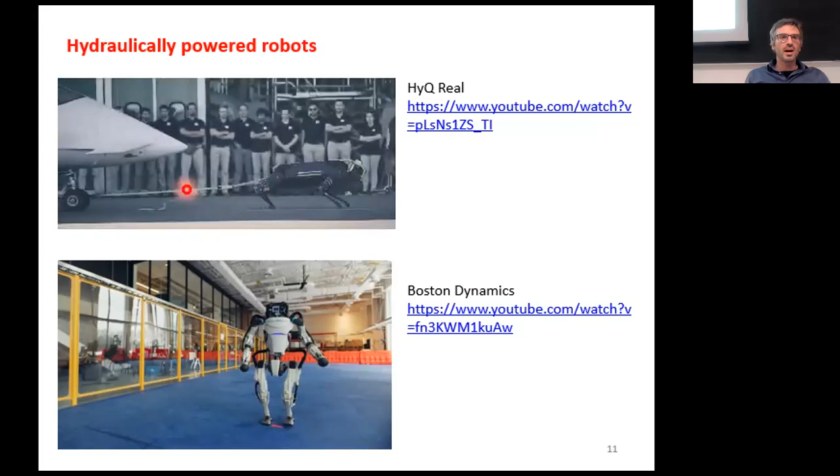This is an experiment we did back in 2017 with our hydraulic robot called HyQ Real. As an example of the power of this robot, we were pulling an airplane weighing 3 tons. To do so, the robot had to deliver a horizontal pulling force of more than 900 Newton to overcome the static friction on the wheels. This was possible only with hydraulic actuators.

The other example is Boston Dynamics' Atlas, which was able to perform very accurate and fast motion with this 70-80 kilogram robot. Certainly you saw this video - it's an incredible example of control accuracy, and also very accurate and fast positioning of the joints.